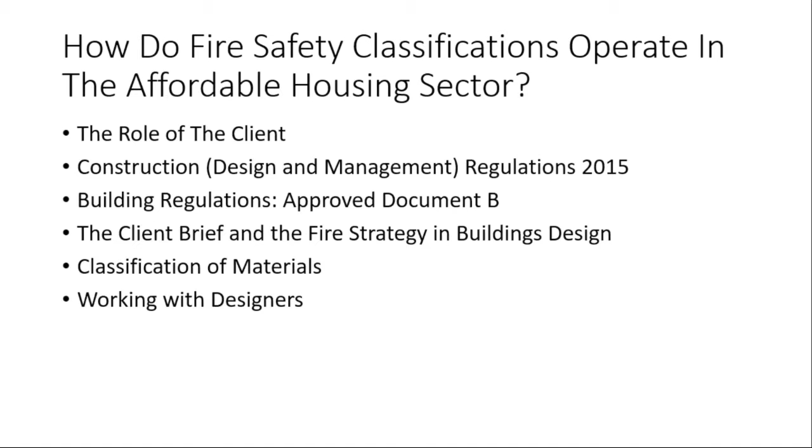The client has overall responsibility for the successful management of the project. That is a statutory role placed upon you by the Construction Design and Management Regulations, and in doing so you need to appoint a principal designer and a principal contractor whenever you've got more than one contractor involved with the project. If you don't make these appointments in writing, the regulations assume that you're going to be carrying out those duties yourself, so you do need to make sure you make those appointments in writing.

One way to help explain what you want from the finished building, as well as making sure that you carry out those duties under CDM 2015, is to develop a client brief. If you do this at an early stage, this will influence how your designers and your builder can accommodate the requirements that you wanted from the building you're proposing to build.

So the brief should include, from a fire safety perspective, the main function and the operational requirements of the building, such as who's going to live there or work there, how many people will be in the building, and whether they can leave the building unaided or will they need assistance to leave. This will help us think about the fire strategy for the building.

Really what I'm thinking about at this stage is what you want people to do if the fire alarm goes or if a fire starts. There are really three options we have. We can either go for simultaneous evacuation - simply that means that if the fire alarm goes, or if there's a sign of fire or smoke anywhere in the building, everybody gets out.

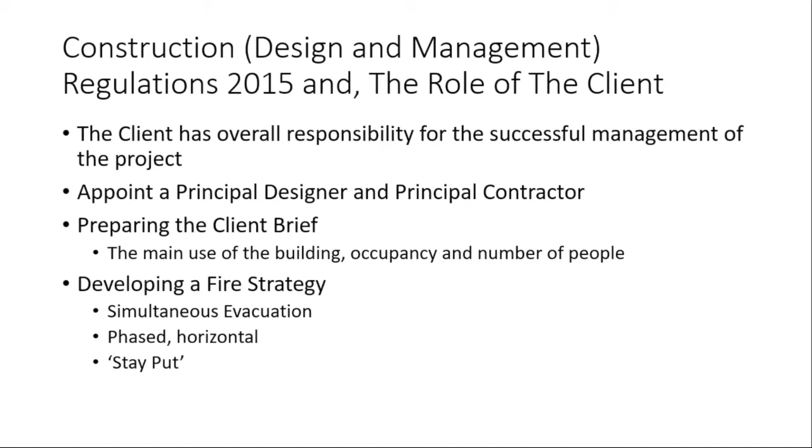And then the last one is stay put, which is really for general needs flats blocks, where we have a fire-resisting box principle. The idea is that the compartment should keep those people safe, provided it's not the flat where the fire is. So it's getting to that sort of fire strategy as to how we're going to design the building, really.

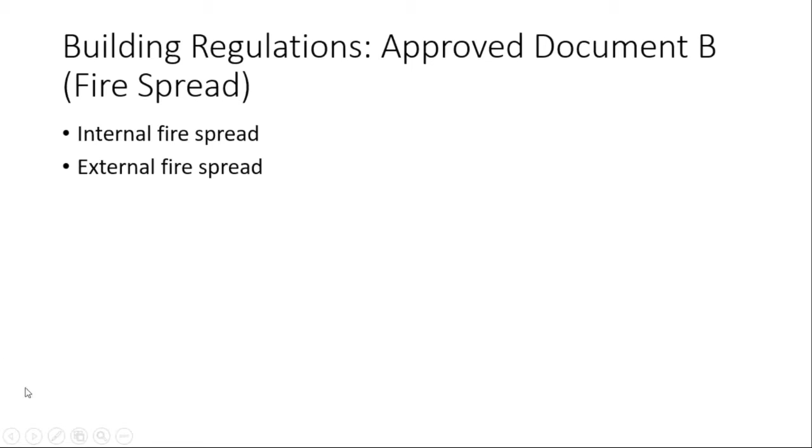If we move on to building regulations approved document B, there's about 400 pages of this, but we're only going to look at the bits that look at maintaining and controlling internal fire spread and external fire spread. So if we look at internal fire spread, ADB makes requirements to control it through four elements: the load-bearing elements of the structure, how it's compartmented, any concealed spaces and cavities, and specifically today we're going to talk a little bit about the wall and ceiling linings.

The requirement is that the materials used to line the inside walls and ceilings of a building, and any other parts of the internal structure, are able to adequately resist the spread of flame, and if they do become ignited, that the rate of heat release and fire growth is reasonable. The provisions do not apply to the surfaces of floors or stairs, because the assumption is that those elements of the building are not going to be involved in the early stages of a fire - the fire will be well alight before they become involved.

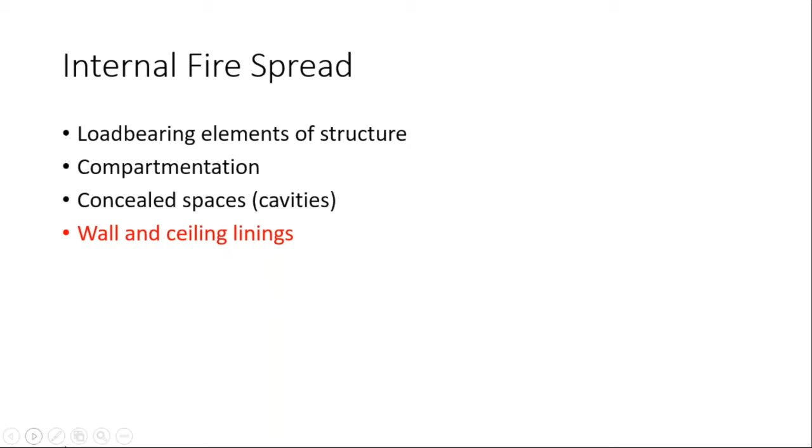It means brickwork, cement blocks, anything cement-based which has good properties in fire. Plasterboards, ceramic tiles, and it can also include composite materials that have been tested in accordance with BS 476 and meet a standard which says it's either non-combustible or limited combustible. If you think about a general needs flats block or a shelter block, the ideal is that it's brick or block or plasterboard lined, something which has a very good property for not promoting fire spread.

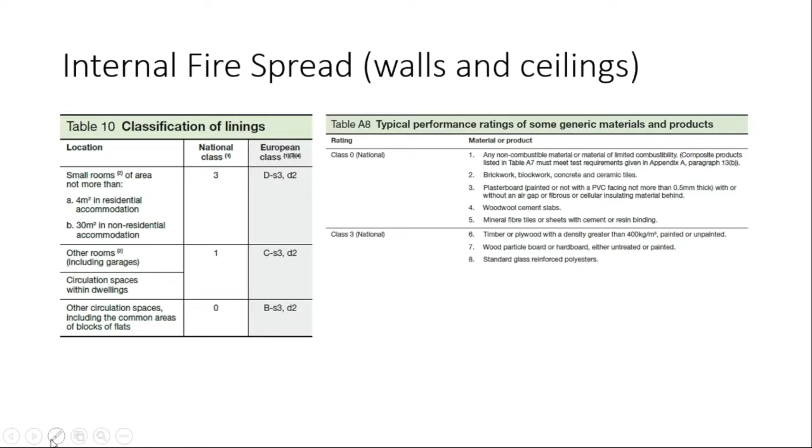Okay, so we then move on to external fire spread. We're going to look at construction of the external walls. ADB also looks at the space separation and the roof coverings.

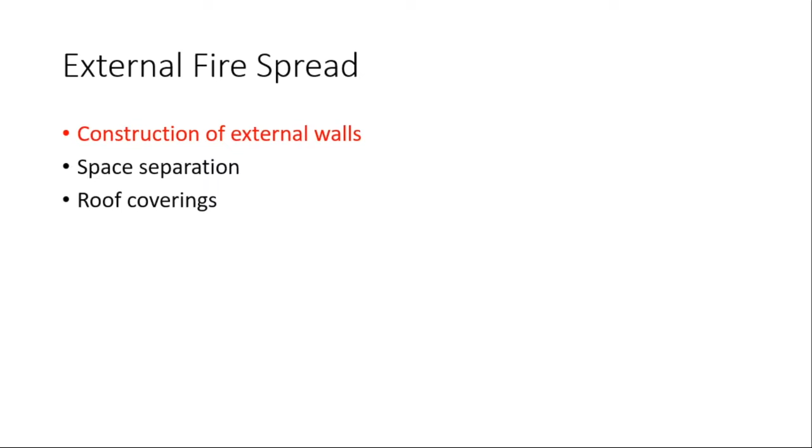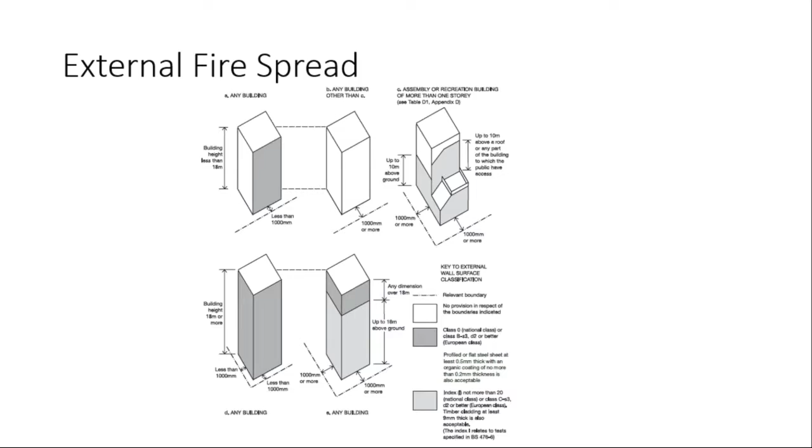As a client, and the housing association having a property built is the client, you should start to prepare a client brief at the very start of planning of the building. The brief can then be used to initiate discussion with your architect and design teams to determine the best fire strategy for the building, whether we tell people to stay put or whether we want them to get out of the building.

In doing that, the designers can decide how many escape routes we need, where they need to be, how many, or the type of fire alarm detection system that needs to be in the building, and also the actual materials that can be used to construct it, which is the main thing we're talking about today. You must ensure that enough time is allowed for the design work and the construction work.

If we compress time because we've got targets that are slipping in other ways, whenever time's compressed, obviously errors are more likely to happen. And set realistic budgets. There's not much that a builder can cut costs on other than labour and materials, and we really don't want them cutting materials or labour. We want well-trained people fitting the stuff together, and we want to make sure they're using materials of the right specification.

And then finally, just beware of design and build contracts. This is hugely used in social housing.

But under this type of contract, the principal contractor takes on design duties during the construction phase. So if the contractor wants to save money, an easy way to do that is by using cheaper materials. You need to make sure there's a contractual agreement on the standards of materials the contractor can use, and a way of handling any design changes needed through the process. There's a process where a contractor must escalate these through the design team and through the client, so that those design changes are approved and not just carried forth at the contractor's will. So that's where I'm coming from today, really looking at the client's role.

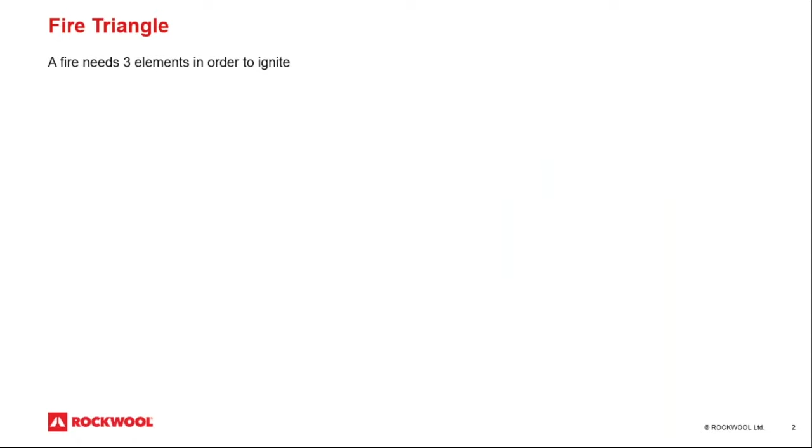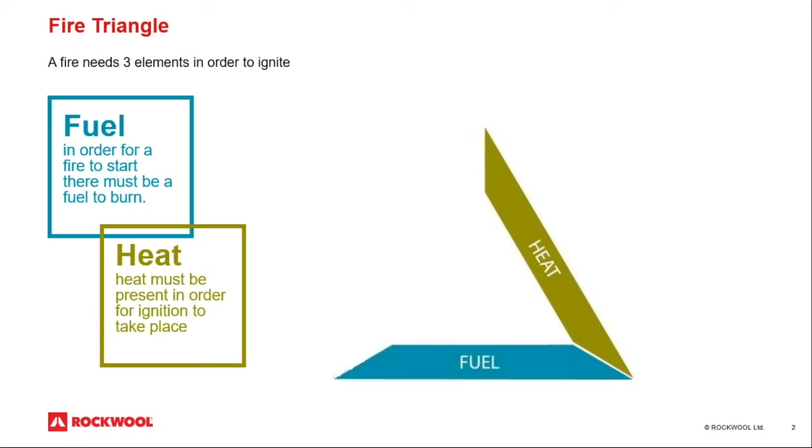Quick bit about fire. There's a fire triangle, which you may have seen, that we always talk about. There are three things you need to have a fire: you need fuel - without a fuel source there's nothing for a fire to use to develop; you need heat - without heat you won't get ignition of the fuel source; and how do you get ignition? That's where you need oxygen, which will ultimately ignite the fire. If you remove one of the elements within this triangle, you will not get a fire.

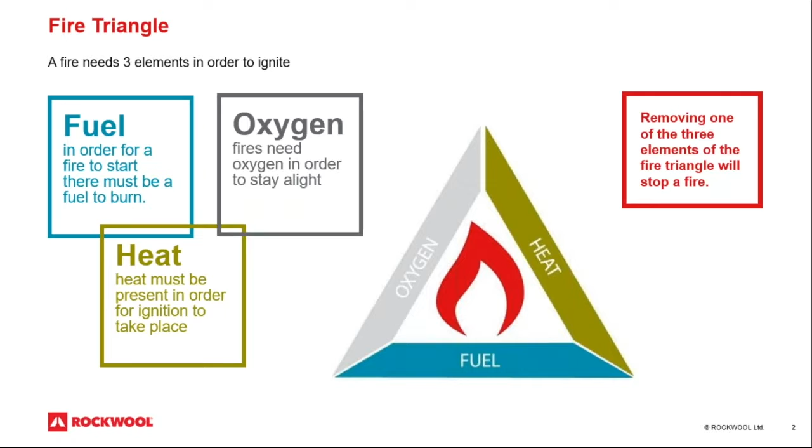If you were to use non-combustible products throughout the building, for example, that is the fuel that would ultimately be removed. You may still have the heat from a potential fire source, be it external, and you'll obviously still have the oxygen. However, the fuel will be either greatly suppressed or removed by using non-combustible solutions. So it's about understanding the product's combustibility, or indeed non-combustibility, to look at it a different way.

A product of limited combustibility, meaning it does not help to grow a fire, would be A2. And if anybody's listening from Scotland, A2 in Scotland is also classified as non-combustible. The non-combustible and limited combustibility terms are an England and Wales thing; in Scotland, A1 and A2 are both classified as non-combustible. Then we go from B down to F, which are combustible products as rated. Finally, there's NPD, which is no performance determined - it was either not tested, or it was not able to be given a classification.

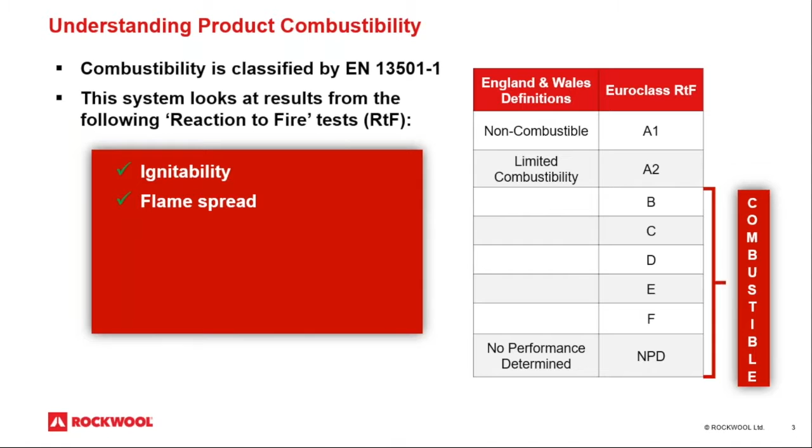So these are specifically reaction to fire tests. What does the reaction to fire test actually look at? It looks at the ignitability of the product. There are 5 tests it goes through: the potential for the product to ignite, the flame spread over the product, the heat emission, and the smoke and toxic gas emissions the product will give off during its burning - or its not burning - depending on which end of the scale we're looking at.

And any character changes, i.e. melting, dripping or charring of the product - that is obviously highly valuable information, particularly for the fire service when they are trying to fight fires with products. You don't want melting, dripping or charring from these products, and that is a key characteristic of rating it on the Euroclass scale.

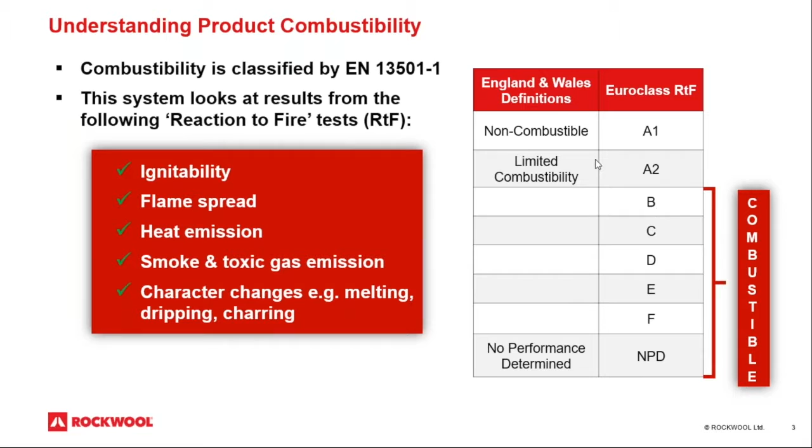So how do you find this out? It's all well and good for me to talk about it, but where is this actually declared? For thermal insulation products particularly, it's mandatory that this is declared in a declaration of performance certificate that all manufacturers legally have to produce. The vast majority of manufacturers will put these loud and proud on the website where you can find them. Some manufacturers you may have to go and ask. However, this is something that has to be available for every particular product that they produce in this sphere.

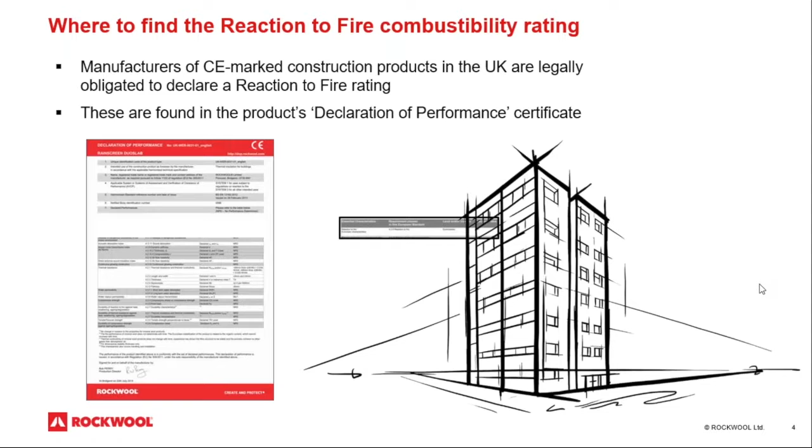So here's an example of our certificate, it's a generally standard template, though each manufacturer would do it slightly differently. I don't expect you to read that, but if I can just blow up the little window in the middle, this is the key point you're looking at. Reaction to fire, Euroclass characteristics - it will say here that for one of our products, it is A1, which means it is non-combustible, and so on.

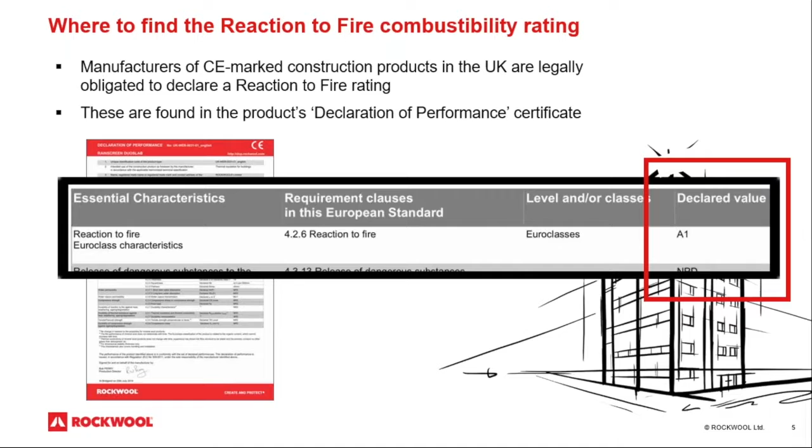If it was B, C, D, or E, then you would know that you are potentially installing, specifying, or already have a combustible product on your building.

So, Class O. There's been a lot of marketing around Class O. What is it? It looks at the surface spread of flame of a particular product. Class O is often believed to be a measure of whether a product is combustible or non-combustible. It is not. It purely looks at the surface spread of flame, the ability of that product to spread flames across its surface and ultimately across a wider area.

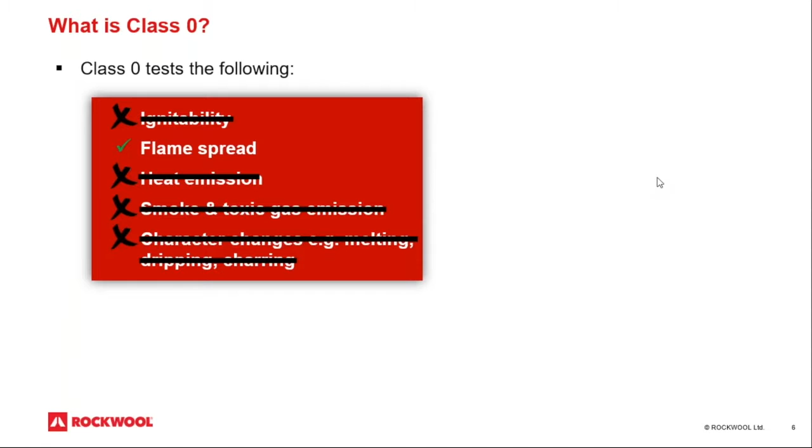So it does not look at the ignitability as Euroclass does. It doesn't look at the heat emission of the product. It doesn't take into account the smoke and toxic gas emissions of the product, and if we think back to the awful events and what we see in terms of reports of last year, smoke and toxic gas played a key part here. Character changes - melting, dripping and charring - are also not taken into account. The only thing it looks at is the flame spread.

The other important thing is the scales are not comparable. So you can have a product that achieves a Class 0 surface spread of flame rating - the highest rating it can achieve in that test. However, when you then look at Euroclass, it is actually a C, which means it is combustible, or even lower down the scale, even more combustible than a B or a C. And that's a key point.

I think Dame Judith, in her report, has talked a lot about the potential misleading marketing from a wide range of products on the market. Sometimes people believe Class 0 is the non-combustible or combustible test, and this is definitely not the case, I'm afraid.

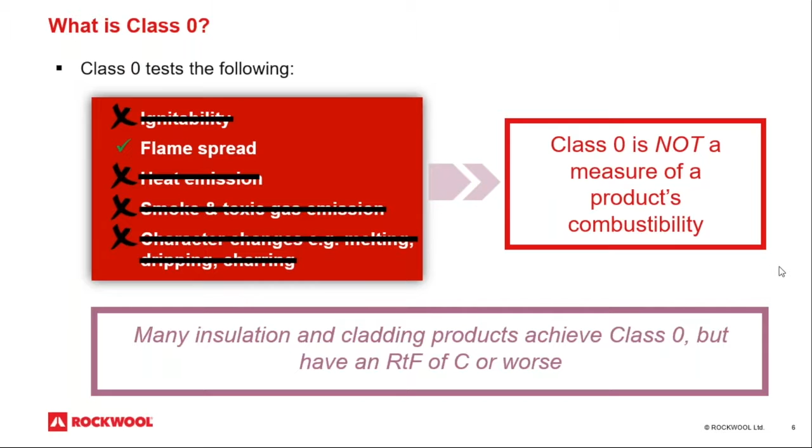Quick snapshot of Document B - Robert's already shown us some of this, but we're going over old ground. The external envelope of a building should not provide a medium for fire spread if it is likely to be a risk to health or safety. The use of combustible materials in the cladding system and extensive cavities may present such a risk in tall buildings.

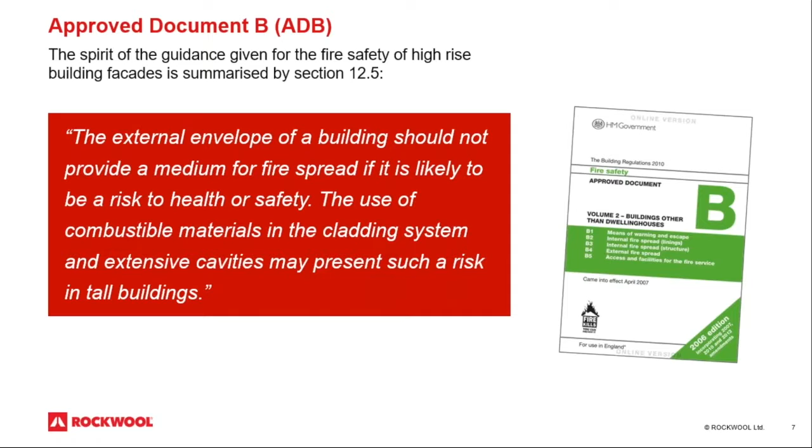How would you go about mitigating this? Of course, I would say: use products that are classified as non-combustible or of limited combustibility, not products that are shown, tested and classified as combustible on the scales that we've seen.

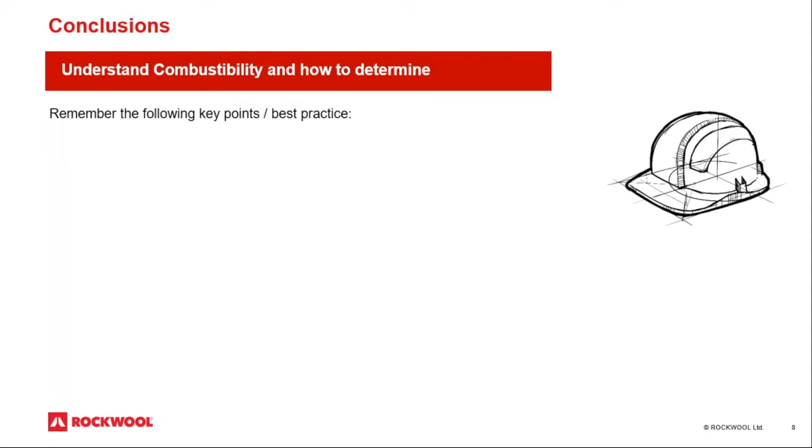So if I take you to my conclusions - understanding combustibility and how to determine it. These are the points I'd like you to take away. Euroclass A1 and A2 materials offer a lower risk option than anything else out there. Check the declaration of performance for a product's Euroclass rating - that is the manufacturer declared, and ultimately test house and third-party checked, way of declaring a product for its combustibility or non-combustibility.

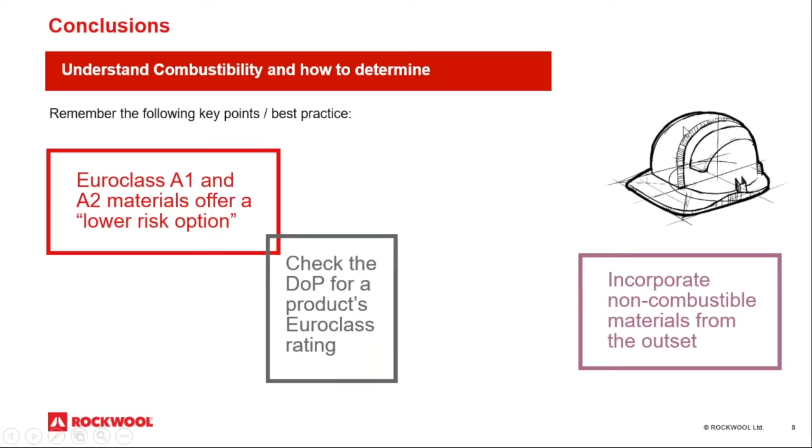Incorporate non-combustibles in the design from the outset. It's far easier to design these products in if they go from the very beginning rather than trying to build it in later on, and utilize the linear route for compliance. This basically means using products of limited or non-combustibility, which avoids having to go down the route of testing via a large-scale testing method such as BS 8414, that certainly in our opinion is not realistic and does not replicate the real world.

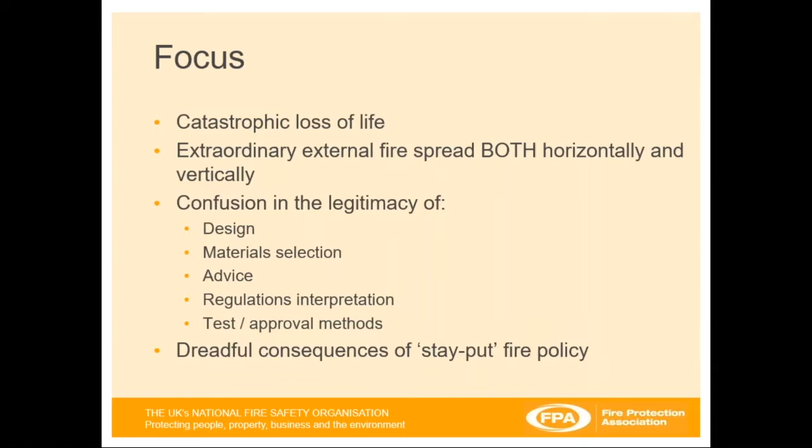The big bad wolf story. But like any story, it can be reviewed from a number of perspectives, certainly in terms of material choice. If you look at it from the insurer's perspective, the brick house clearly represents a far better insurance proposition for wolf protection policies than the straw or stick-built buildings do, which is a passive solution to a resilience problem. Straw and stick homeowners could, I suppose, be armed - that would be an active solution, so that they keep the wolf from the door. But from the government's perspective, stick, straw and bricks are all appropriate materials for ensuring life safety from wolf risks, because none of the pigs died. So we can see that there's a bit of a dichotomy there between what we think we might be getting and what the government and legislation promotes that we should have, against what we think we might be getting in real terms.

As we're aware, when we talk about Approved Document B, we talk about the Regulatory Reform Fire Safety Order, we talk about the Construction Design and Management Regulations, we're talking about life safety measures principally. But anything over and above that which might be introduced to improve the survivability of the property or the services it provides is entirely voluntary. So when we're designing in accordance with the building regulations or trying to achieve the building regulation requirements through the application of Approved Document B, we're really only satisfying a life safety requirement.

It's interesting to note that the Companies House website says very clearly that a managing director should act in the long-term interests of their stakeholders, investors, and employees, which is really talking about resilience, but that tends to get overlooked, I think.

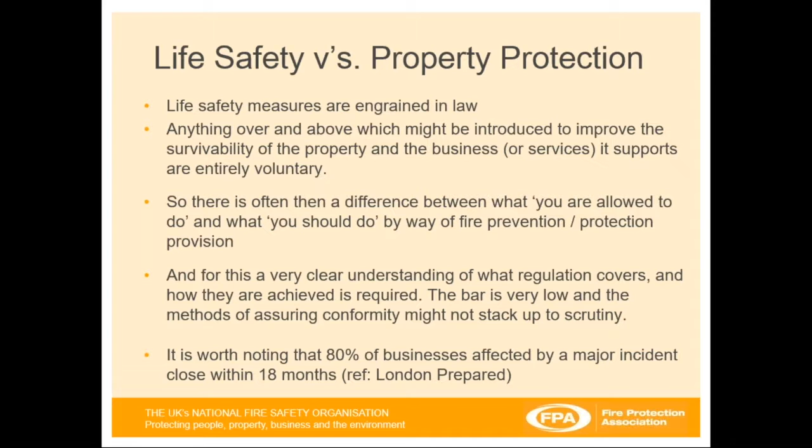It's worth noting that 80% of businesses affected by a major incident close within 18 months, and that comes from the London Prepared organisation. This shows that if we continue to design and build in the way we are, a significant fire has the potential to put businesses out of business very, very rapidly.

But what are the changing risk factors? There are a number of them really. Certainly in terms of the materials we're using - light timber frame, greater use of plastics, structural timber panels with an insulation material, often a quite combustible insulation material - which are all affecting the resilience and safety of our buildings, despite what we may be able to achieve through complying with the approved document, because none of these premises would necessarily fall outside of that requirement and would all provide a premises which is safe for people to occupy in terms of life safety.

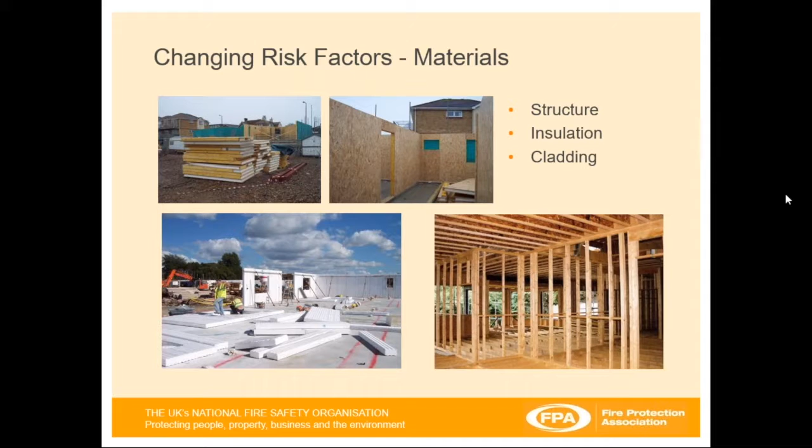But in the event of a significant incident, you're probably looking at significant destruction of the building. And if you look at our legislative history, we seem to be coming back in a circle to a place where we started, going back as far as 1666 and the Great Fire of London, and the legislation introduced then to stop the use of predominantly timber and to keep sensible distances between buildings. We're now moving right back round in a circle where we're seeing the greater introduction of these kinds of materials back into our construction and built environment.

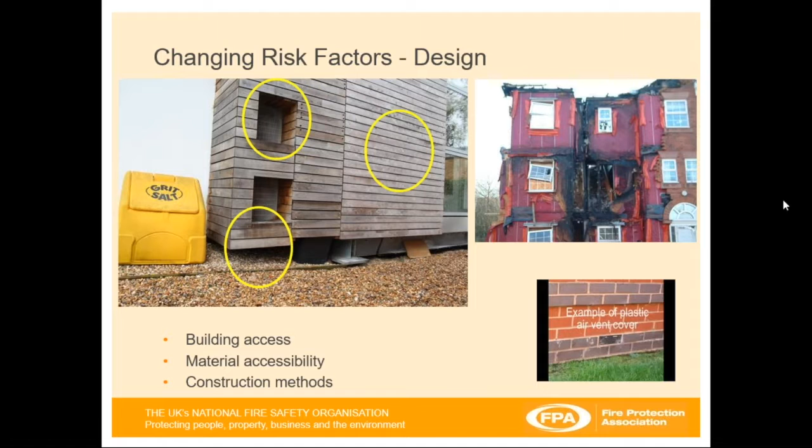In addition to materials, there are also issues associated with the design of buildings. We're also changing the way we design buildings - using more modular buildings, and providing different construction means and methods, particularly in the way we access our buildings and in the way we ensure they're heated and cooled, that do have significant implications for us.

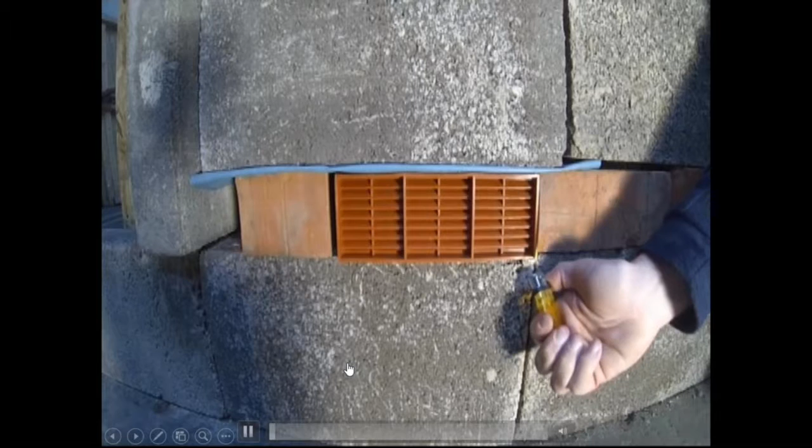I have a little video here - I don't know whether this will work, but this was on the back of some investigative work into fires in timber frame buildings, where fire was found to have got into the void and caused significant damage.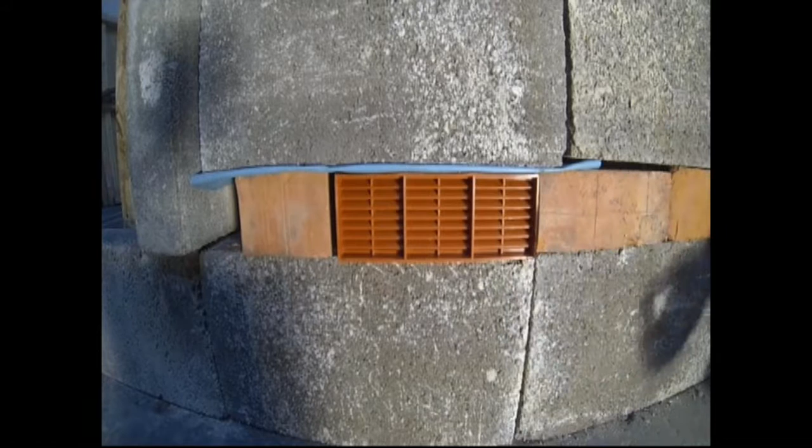The eventual cause of the fire was noted to be cigarettes dropped into wood chip around the side of the building, used just for decorative purposes. This ignited the plastic air brick and spread fire into the cavity.

I'll let this run for a few seconds, but I'm sure you'll pick up quickly what's actually going on. We recreated this problem in our laboratories, and we informed DCLG of the weakness. Their response was that at that time there were no plans to change building regulations at all, whereas we could clearly demonstrate that there was a significant issue that needed to be dealt with.

There'll be a side view in a moment - you'll be able to see. Anyway, the video goes on to show how fire has spread very, very quickly into the cavity itself and has started to attack the timber frame.

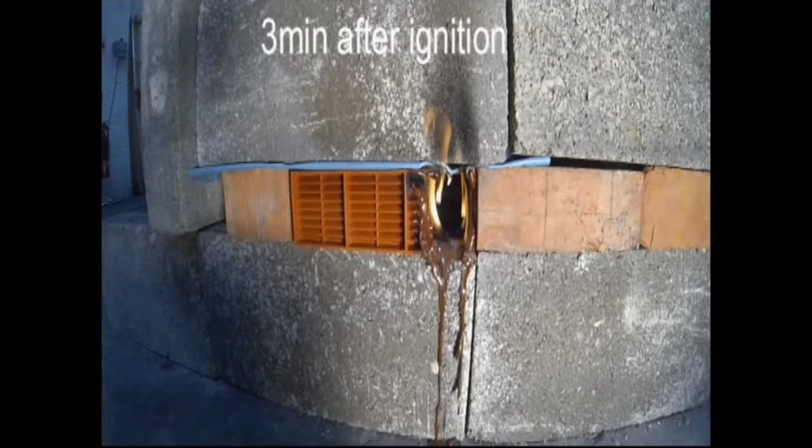On top of that, we also have issues associated with the energy systems we're using. Not that they're a particular problem, but certainly they introduce additional voids into the premises that may enable fire to spread. We might be meeting BREEAM design and environmental targets, but the likelihood is that we're weakening the fire safety and resilience of our premises.

So you'd think that in these circumstances, with the changed environment, the rules and regulations would be reasonably stringent. But here's another short video - it's interesting to note, in terms of cavity barriers, just how what we understand as common behaviours in terms of protecting cavities behind rain screens actually plays out.

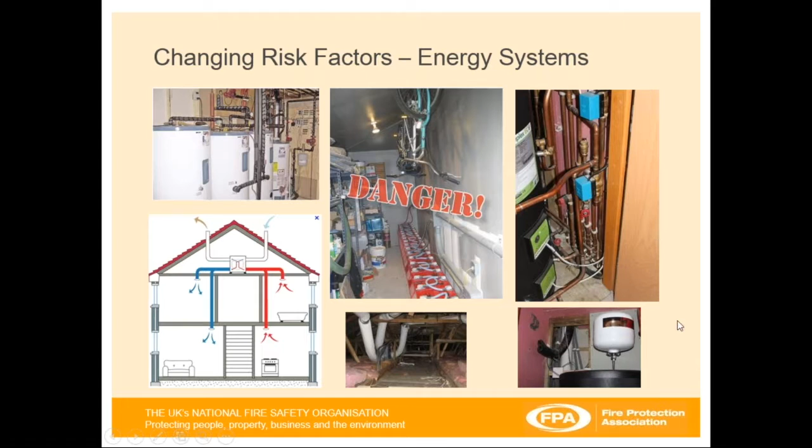We've got technical guidance here which says that technical failure of integrity and insulation would be deemed to have occurred at the start of the test due to flame passage through the open void. So where these intumescent products work, they can often allow a bit of time to operate, and hence allow fire to spread between one side of what should be the barrier and the other.

The approved document B and the building regulations are about fire safety, not resilience. A quote from the building regulations is that they're intended to ensure a reasonable standard of life safety, not to ensure the resilience of the premises.

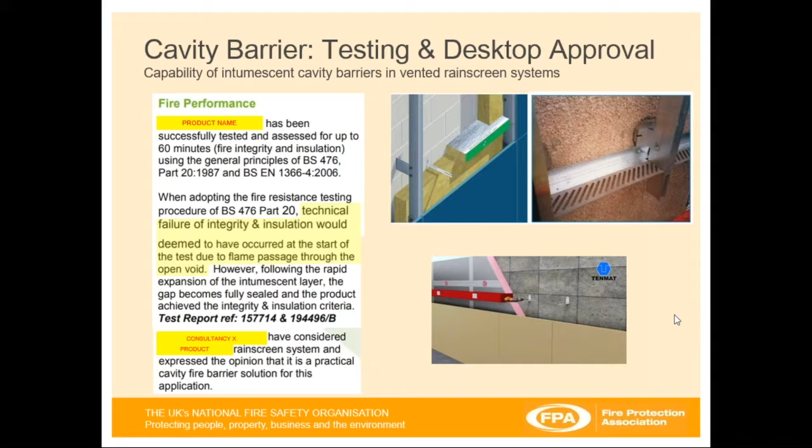There are alternative approaches to using approved document B and the prescription that it provides, listed within the document itself. One area for concern is the fire safety engineered approach—not because fire safety engineers can't be trusted, but because it's very often used for different purposes than anticipated. Value engineering being the phrase of the moment.

This is a quote from the Hackitt Review, where they repeatedly heard that common practices such as design and build contracts and value engineering can often result in uncontrolled, undocumented and poorly designed changes being made to the original design intent. Value engineering promotes the substitution of materials and methods with less expensive alternatives—clearly something we should be trying to avoid.

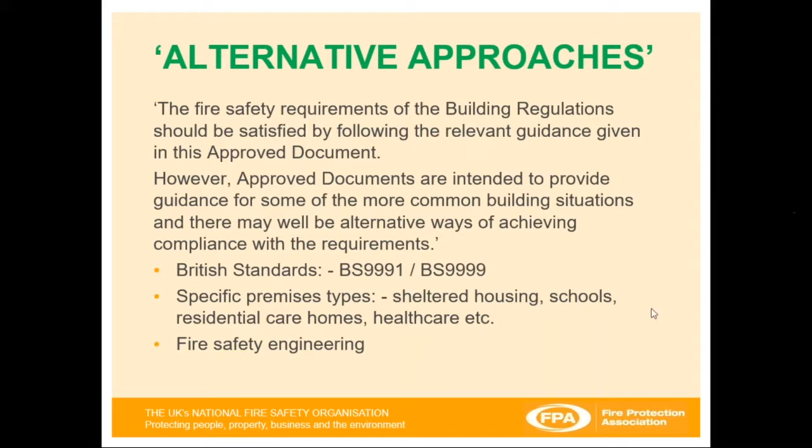I've got a couple of examples here of information taken off fire engineering consultancy websites, which indicate that they even promote the fact that they can design premises with no sprinklers anywhere in the development, including the underground car park, reduced compartmentation between the car park and levels above, reduction in fire-rated facades, freedom to use larger areas of openable windows, reducing smoke ventilation, removing the need for sprinklers, reducing periods of fire resistance, and reducing the level of smoke detection. This is taken directly from other people's websites, not something I've made up, and you can see how that's used.

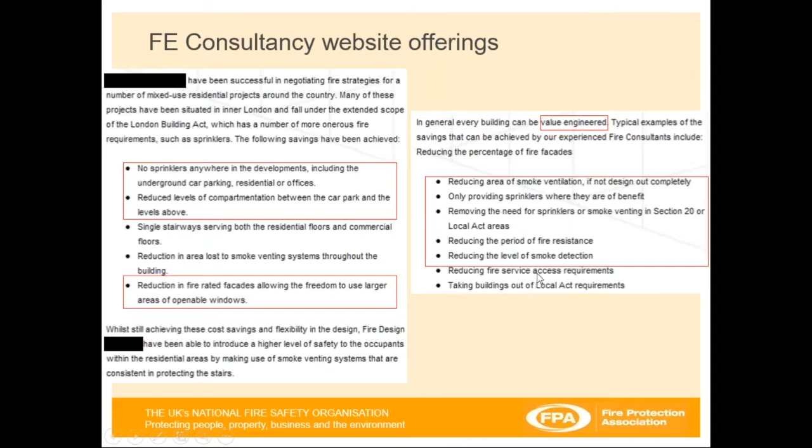I just want to touch very quickly on responsibility before I finish. It's important to understand that within the Regulatory Reform Fire Safety Order, there is a requirement on the responsible person to do various things.

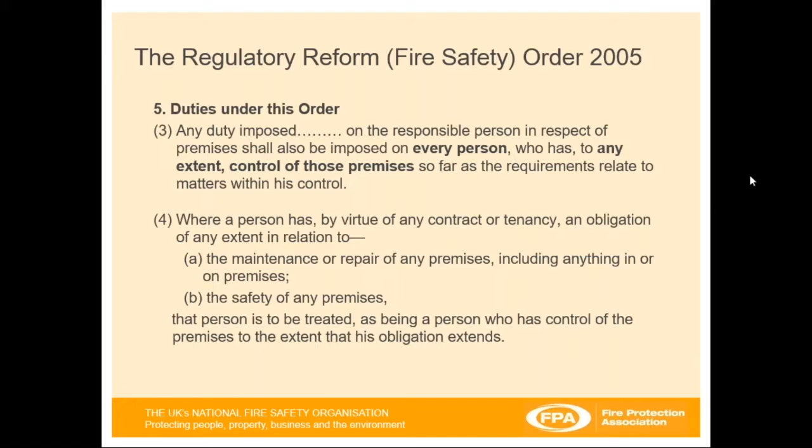But the legislation goes on to say that where any person has, by virtue of any contract, tenancy, or obligation in relation to the maintenance or repair of the premises or the safety of the premises, that person can also be treated as somebody who has control—and hence somebody who can be held responsible when things don't go right.

So making the right decisions at the design point is an important issue here, in ensuring the safety of the premises, the people in the premises, and protecting your own backsides in real terms.

The requirements here are reasonably similar to those in the CDM regulations. If you're involved in the provision, maintenance or management of fire safety at any level, then you share liability for its usefulness. It's not a duty of care or voluntary—it's very clearly a legal obligation and something that absolutely needs to be taken seriously.

It's important also that you use the right people, and I think that's something we need to reflect upon. One of the questions that popped up earlier asked how we can ensure that a building that's already been designed meets our own objectives—the best way is to appoint your own competent people to review the design and ensure it achieves whatever it is you want it to achieve.

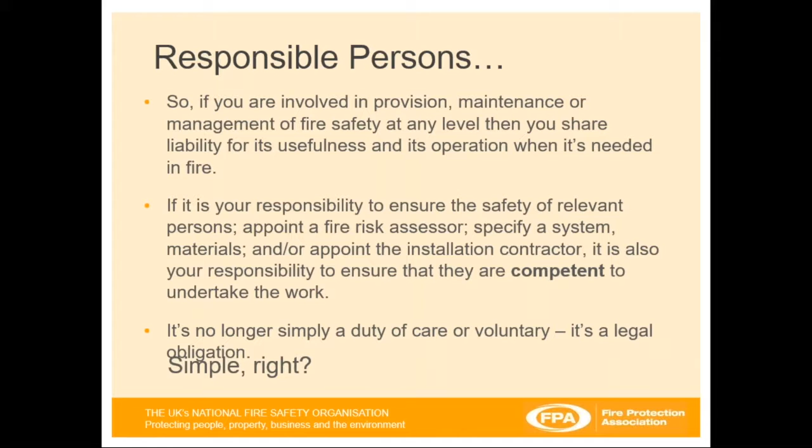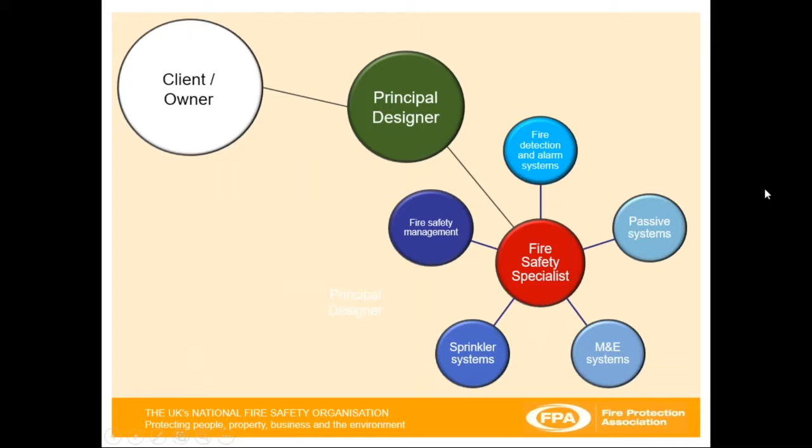Just a few bits of guidance to show you how complex things are. In terms of purpose-built blocks of flats, difficulties in the application of legislation were solved by the production of guidance by the Local Government Group. Hopefully the image of that document will appear in a few moments.

But then we also have the current National Fire Chiefs Council for Fire Safety and Specialised Housing, which states that this guide supersedes the Local Government Association Guide in terms of safety in sheltered housing premises. So you need to find the right people to ensure they understand these changes, understand safety, understand where to look for appropriate guidance, look at what the client design brief does, and look at the properties of the materials they intend to use to make sure you achieve exactly what you want.

So it's important that we use best practice guidance and standards. We use competent people because the legislative requirements are inexorably linked with that. We use products and people that are effectively certified, and trade association members wherever necessary.